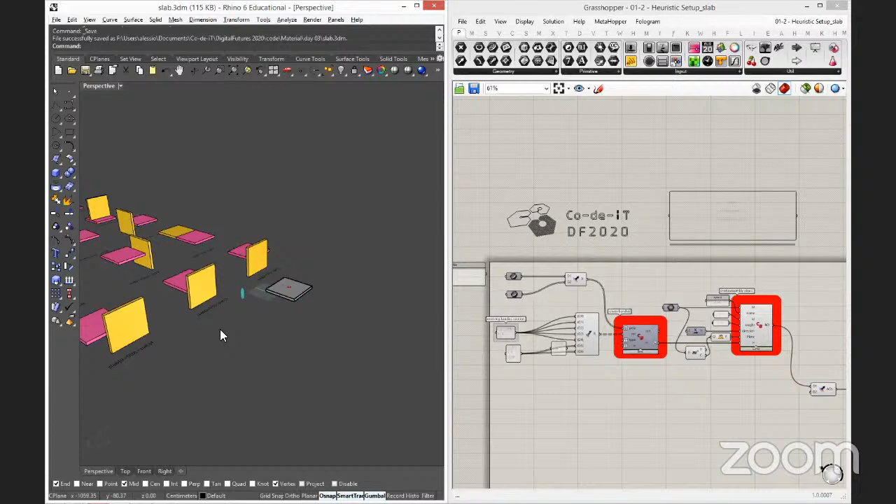Behind this - so yesterday I was fiddling around and while working with some simple combination of components, the one that we were starting to see yesterday made of this block of 2 slabs, something occurred to my mind. I said, okay, these are like 2 identical slabs, so why not reduce it to 1 component and just change the location of the handles?

So that, for example, this one or this combination that was a single component is actually one of the possible occurrences of how these things are assembled together. So while doing this, I tried it in a simple random assemblage.

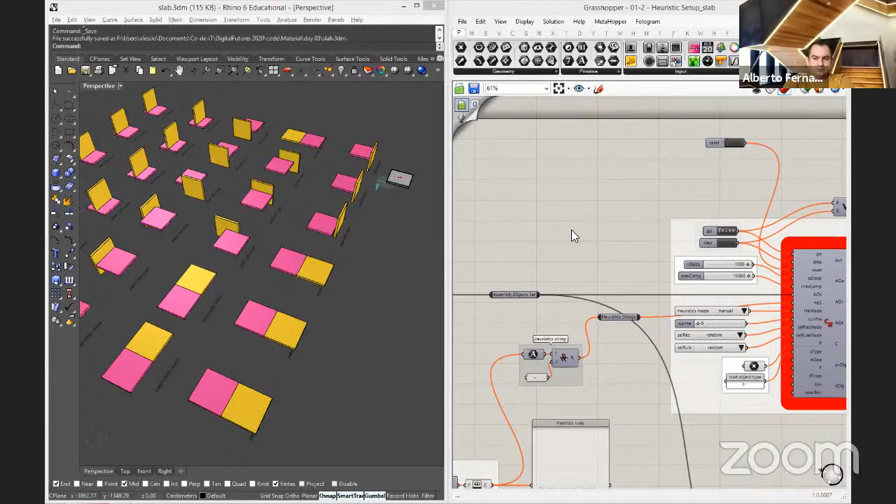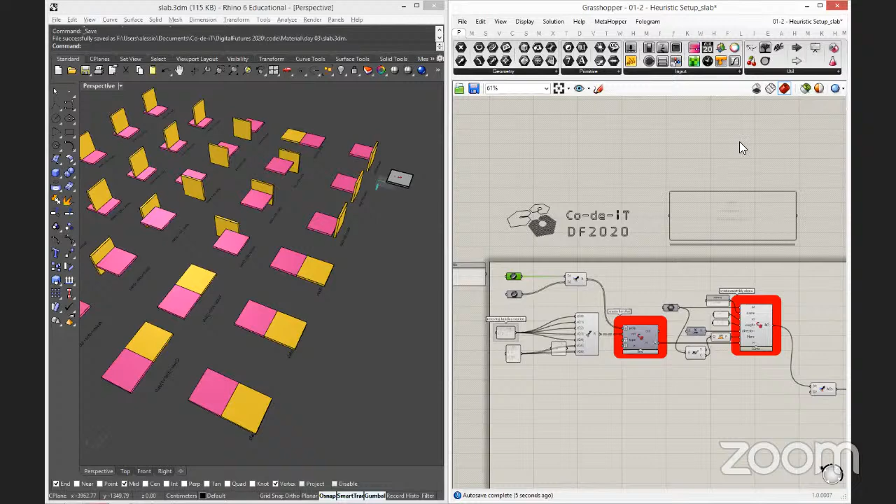It could be that I get an error right now. Yeah, hold on, I think it's complaining a little bit. Yeah, it's complaining because of the thing that I told you, but no problem, because I'm going to just copy paste this thing and it should be okay. Is it? Oops. No, it's not okay. So let's try.

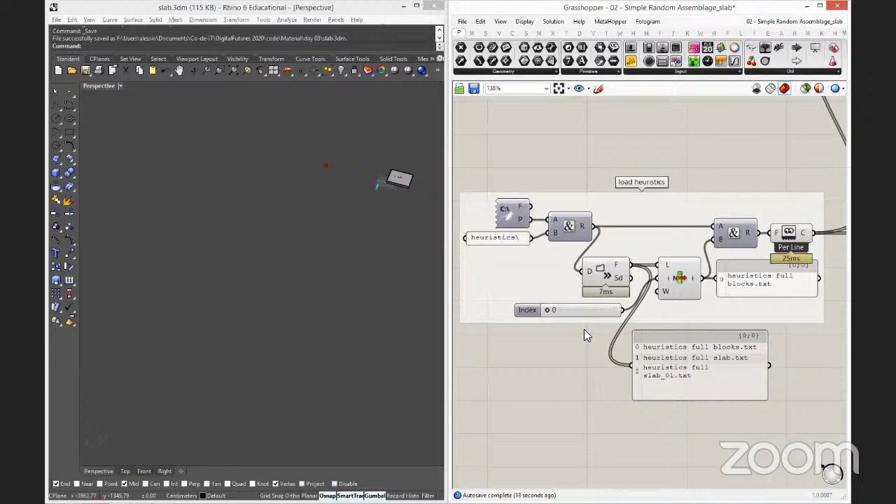Well, then I'm loading - oh no, I'm loading the wrong heuristics, sorry. Let's load this one. Okay, it should be fine. Well, not 1,000 at a time, but yeah, 10.

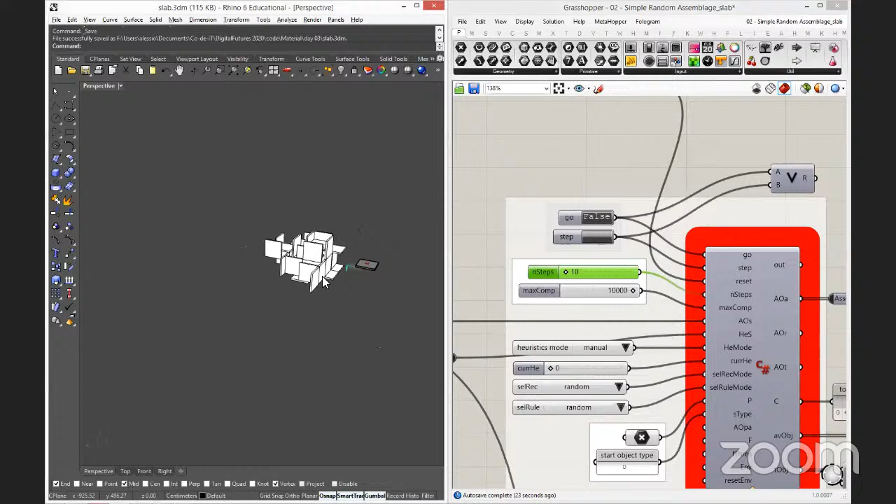So if you go on, it's totally random, so don't expect a lot of order to emerge, but you can already see that there's a very flexible range of possibilities for the assemblies just by reducing a lot the complexity of it, but cleverly enhancing the number and position of the handles.

So there is one that is exactly centered, one that is like a quarter, so it's half of the half here, and one that allows the two objects to form exactly a corner. And then with the rotation, you also have the possibilities of some overlappings, and some other emergent things can happen.

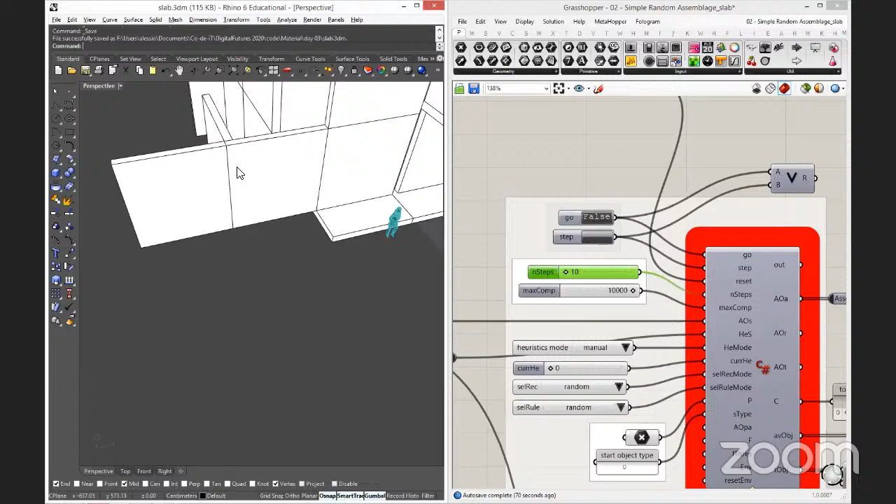It will be interesting to try to get out of this regular grid of overlapping just by moving these handles around a little bit, creating some sort of tatami organization in the interlocking of parts. The system will take care of all the inconsistencies and potential overlapping or compenetration. Sometimes when you realize your part is made of a combination of simpler parts, it could be more interesting to reduce it to the elementary building block—more generic, less specified—and then you open up another range of combinations.

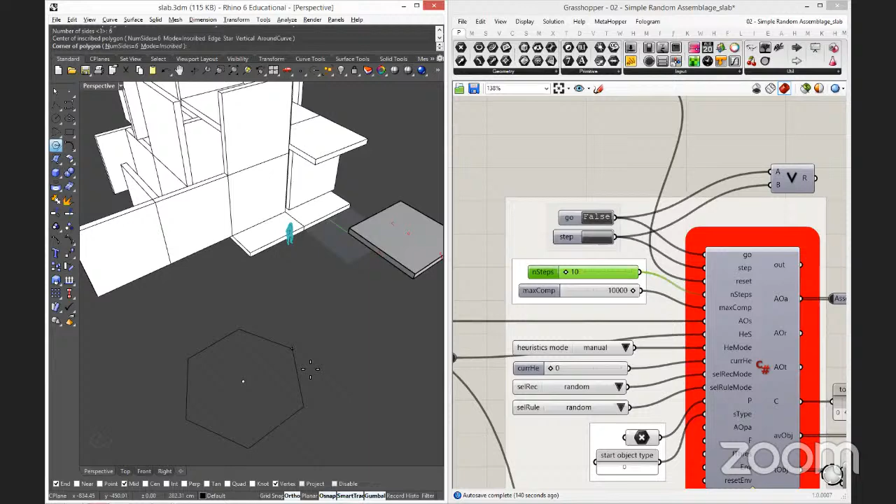One other thing that happened when teaching some students, and also in the master, was that a lot of people were attracted to hexagons. I like hexagons, nothing wrong about them, don't get me wrong. But the hexagon is quite a specific figure already, and it has the property of being extremely symmetric in many directions. So if you tile up a lot of hexagons, it's really hard to come up with something that has a sense of direction, some anisotropy to it. It's a very isotropic figure, like all regular polygons. The pentagon has different properties, but still.

Another thing that would be interesting is to get out of the square thing here and make the slab with different proportions, so that you have anisotropy here too, and see what happens in the assemblage. That will become another interesting thing to see.

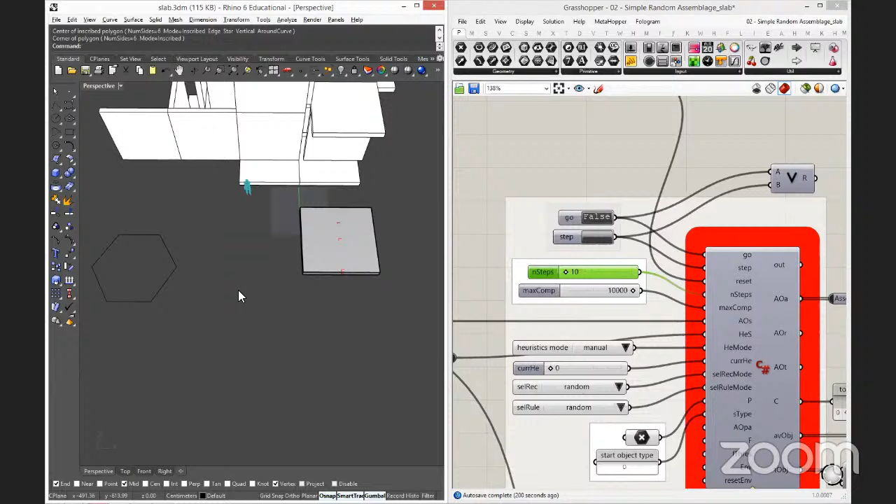But if you look at this, you can realize you can break out this module, this regular thing, in multiple ways that give birth to something more interesting. For instance, you can break it in two, these two trapezoids. And if you think about what a single trapezoid can do—yes, of course, they can combine and form the hexagon again—but then you have a lot more flexibility in what they can do as a figure later.

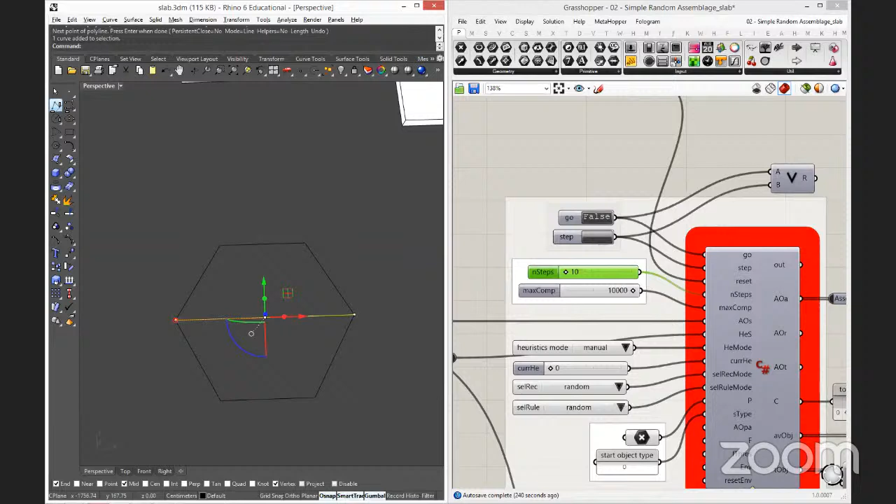Or you can break it in three parts, and then you have like three diamonds. Still, if you take one of these as a single figure, you have a lot more possibilities for an extended form of organization that goes into something less static and less periodic than just repeating the hexagon itself.

Then, of course, you can have the six triangles, but that starts to become a bit too elementary and generic. The figure becomes so unspecific that it becomes like geometric dust—you can make anything out of it, but it gives you no defining characteristic from the get-go.

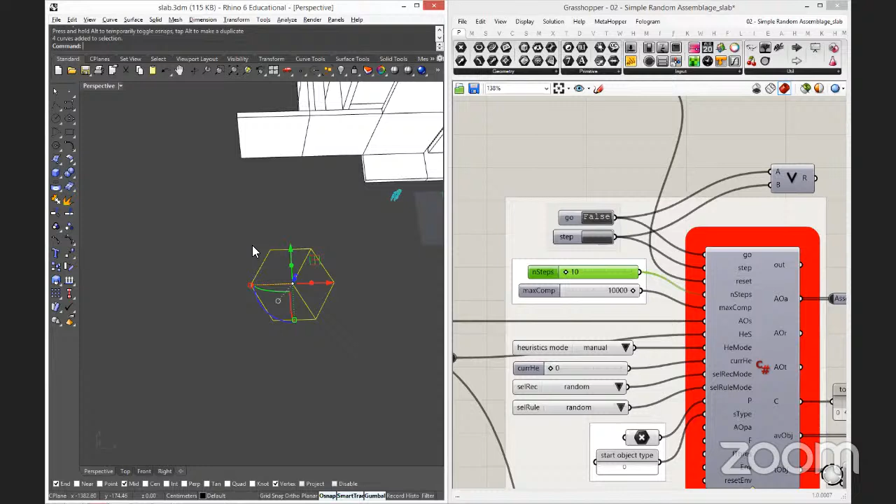So the other thing I wanted to show you was a post-processing strategy. I'm going to save this—I'll update the file related to the slab, and then you could download the material again from the same location. I'll let you know when I've done the update. So I'm going to open the other part, which is the blocks.

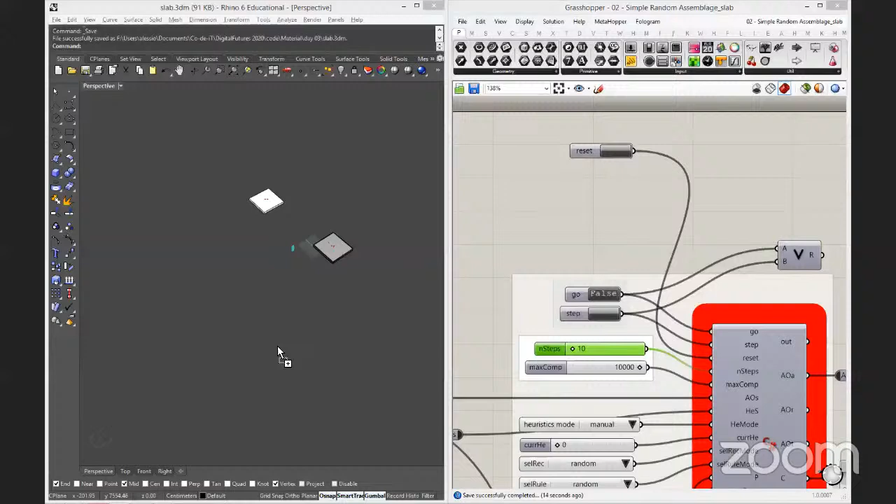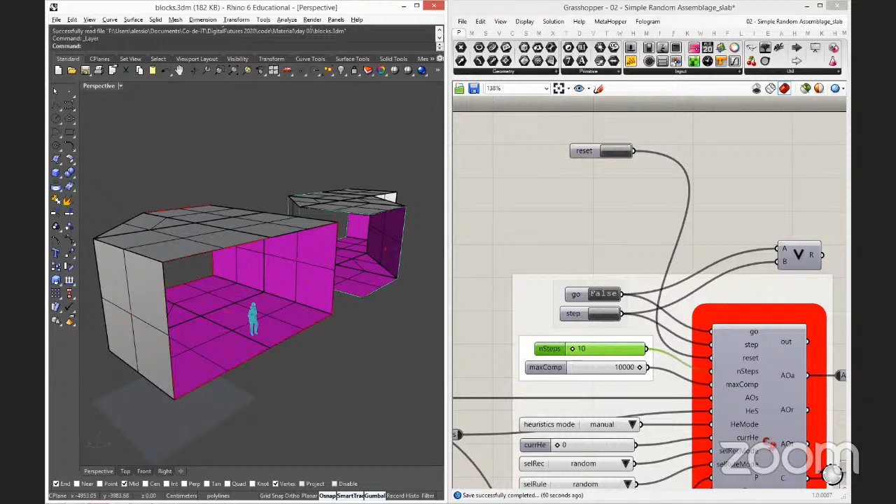In this case, I was working with some of the figures from one of the files I already sent you about the components, but with one important update—so far the shape of the object isn't that important. It was just to get something modular that can attach in multiple ways. I left these openings on purpose that are just in the final geometry. The collision mesh is still a closed mesh—they're in a separate folder because the collision mesh needs to be closed, like I told you, otherwise collision detection doesn't work. But this is the final geometry.

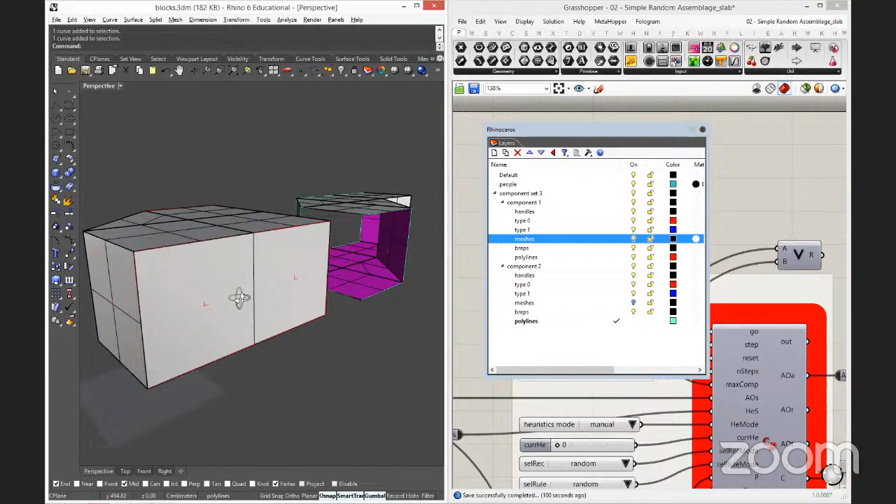In the openings, I've placed these two open polylines—so there's an open or closed polyline here. And in the opening, there are two handles, because if I switch the mesh on again, the opening is basically made of two modules. So each modular part of the object can get into an opening. But then, knowing which handle becomes connected or occupied, you know some polylines might be available and some might not be anymore.

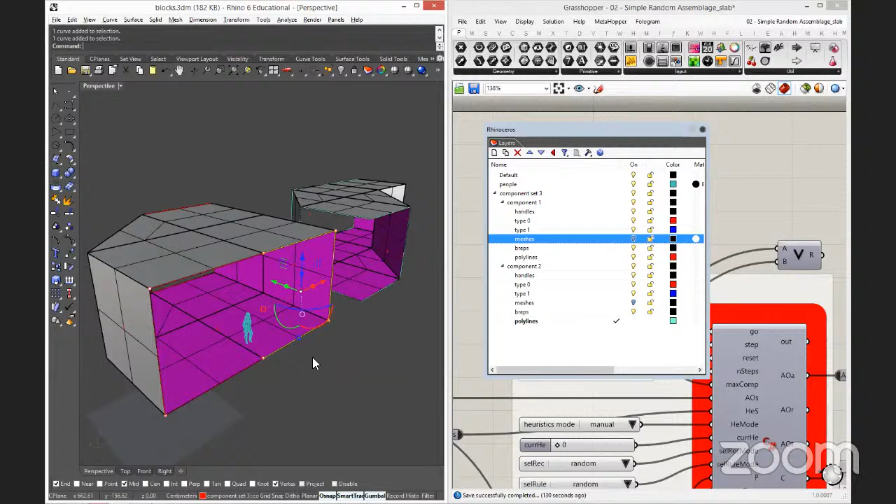So why two open polylines instead of a single one? Because then you can select them by handle, and at the end of the assemblage, you can try joining all the open polylines. The ones that get joined will give you the single figure for this big aperture, this big opening, or this corner opening.

Same principle: if half of it is occupied, this polyline gets filtered by the selection, and you're left with the open polyline. So you try to join everything to see if you get a larger figure, and then whatever polyline is left, you take it and close it if it's not closed already.

This means you can manage openings of different shape and size. And if you work it cleverly enough, you can also figure out when these openings start to get stacked together, so you get an enfilade of openings, or a vertical shaft of windows, or something like that.

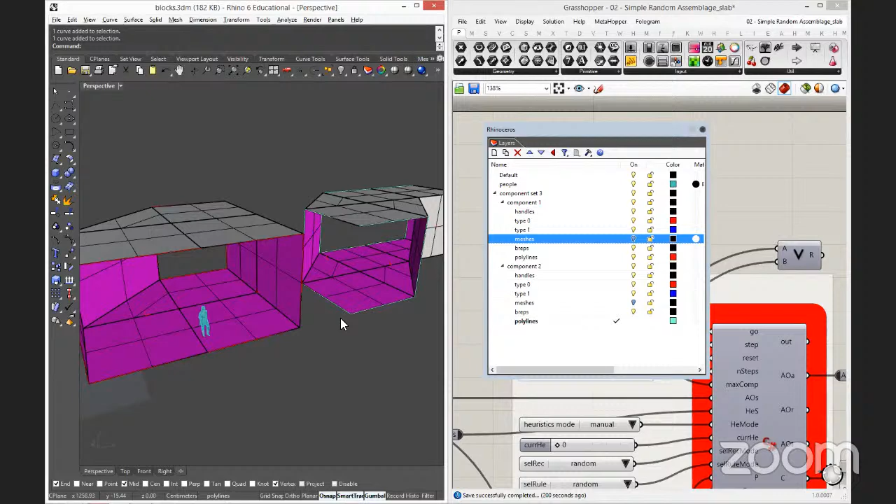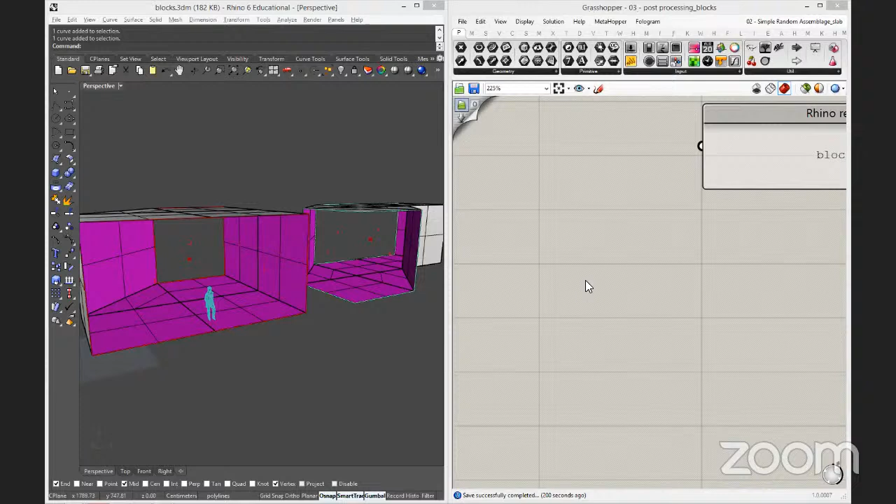So let me show you how it's worked out in an assemblage. There is also a definition that generates the heuristics, and another one that generates a simple random assemblage. But since I want to focus just on the post-processing parts, I've saved this definition that can load it.

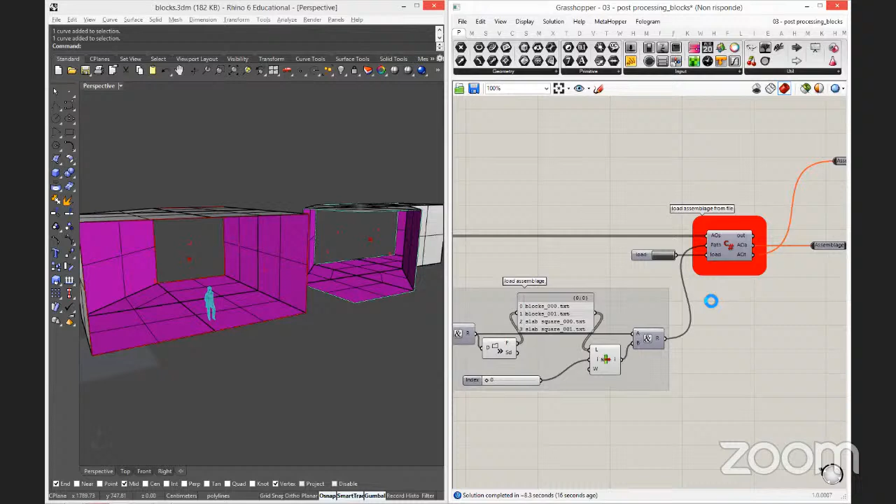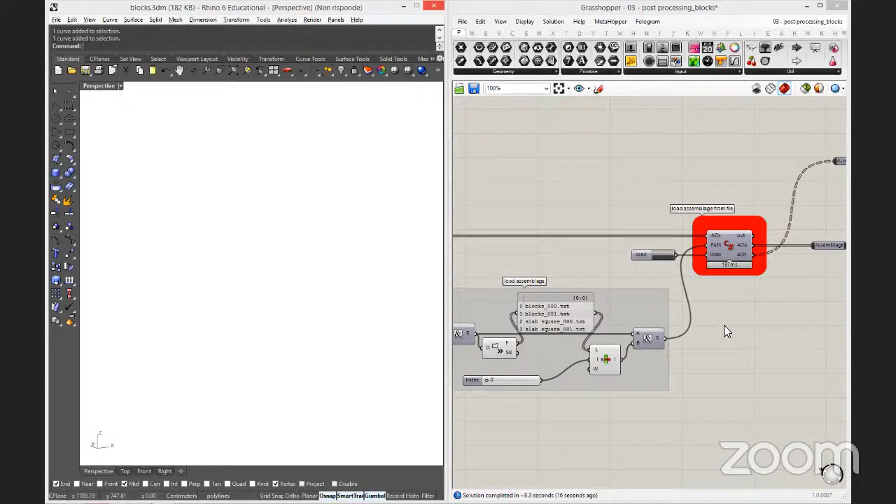Is it loading the right one? Blocks 000, yeah, right. It's going to take a while because the post-processing takes a little bit of time. Okay, it's not done. Taking its own time.

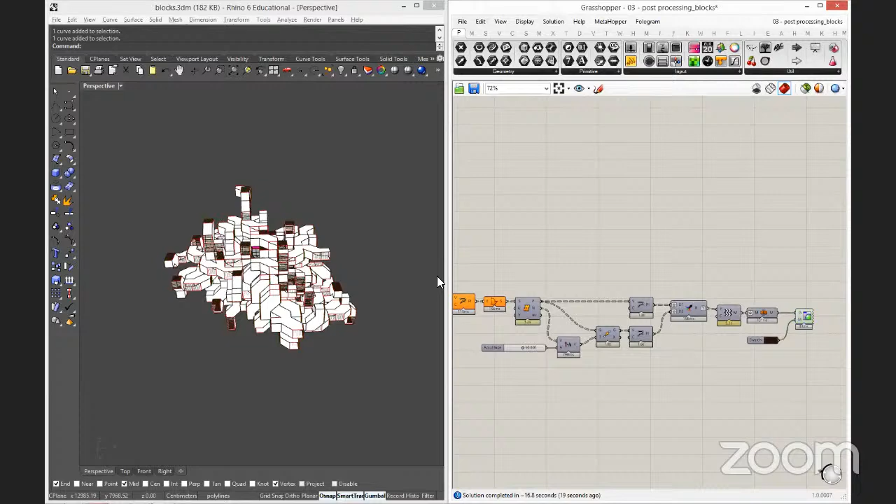But yeah, I think it's all right. So let me go to the end so I can focus the view on these parts. It's okay, oh, I'm looking at it upside down.

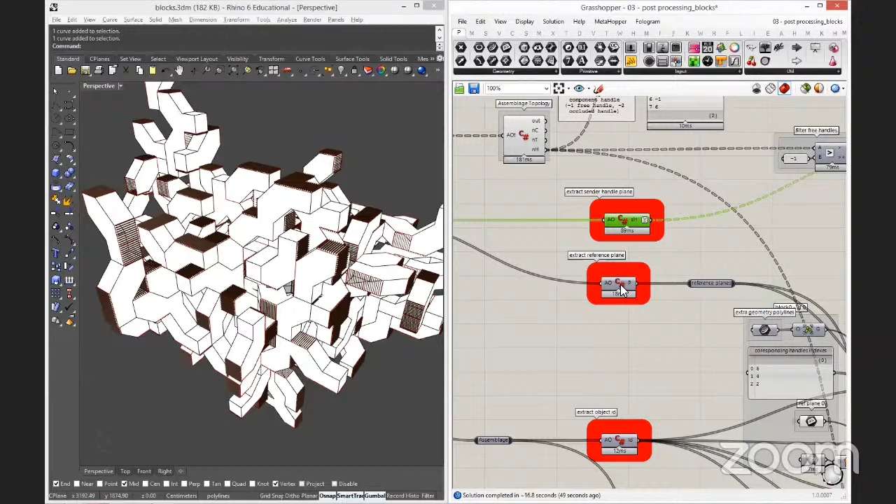All right, so starting from the assemblage that you load from here, that's some of the usual analytical breakup of the assembly object that you've already seen. So extracting the handle plane, extracting the reference plane for each of the components, extracting the object ID to recognize who is who, and also extracting the meshes for the preview.

And then in here, I've placed a couple of groups that contain, for the object at ID 0 and the object at ID 1, the extra geometry polylines I was showing you, the reference plane, and the final geometry, which is the geometry with the opening, that then will be substituted for the collision geometry.

So first of all I need to filter - actually, I am combining all this data according to the object ID, so that here I have, for each of the objects in the assemblage, a list of their IDs. So I'm just associating to each of the objects the proper set of data.

Curves - these are the indexes of the corresponding handles to each of those open polylines. So the first open polyline is overlapped at the place of handle 5. So if handle 5 is occupied, I could filter the corresponding polyline out of the process. If the handle is open, is free, then the polyline is filtered in, and I can use it to place my post-processing data in here.

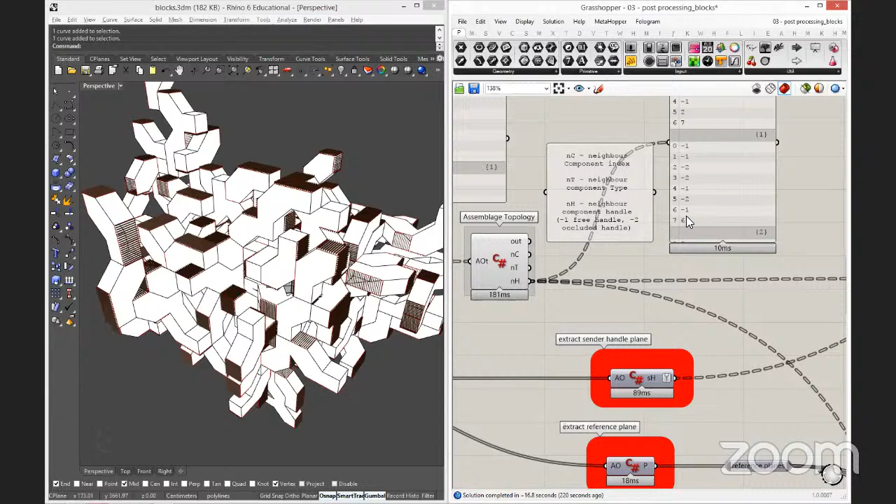So I can filter the free handles, but all I need is the pattern, which for each object is a pattern of true and false ordered by handle index. So all I'm doing is picking from this list, which is general for all objects, just the right indexes for each object ID. So for every object that has ID 0, I'm going to pick the value true or false at index 5, 4, and 2.

So I know that, for instance, the first object is ID 0, and handle 5 is occupied, while handles 4 and 2 are free. So 2 of the 3 polylines in that object are available to do something. Same thing for the other: this one has 4 values, so it's type ID 1, with handles 0, 3, 1, 5, and they are all free. Perfect, I can use all of them.

Once I've done this filtering, I apply it to the polylines. The polylines travel as a group for simplicity, so that I can distribute them according to the object ID. Once they are oriented, they get unpacked as polylines. If you switch on the ungroup after the orient, you'll see that all the polylines have been oriented in place properly, in the position of their corresponding object.

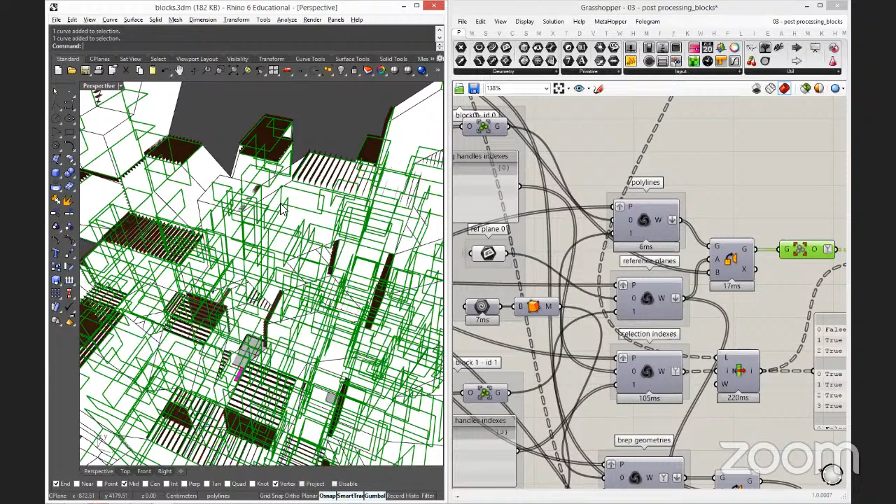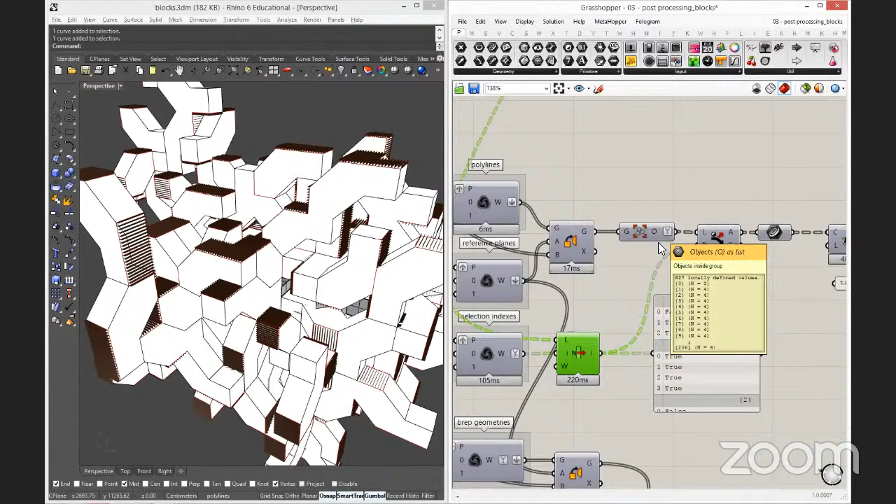Then I need to filter them, but I already have my filtering pattern here. The important thing to check is both the number of data and the structure - they should be absolutely identical, so that for each polyline or corresponding data you want to filter, you have a matching value in the true-false pattern. This tells me I have 827 data in 207 branches, and this matches exactly. So I can use it to filter out the positive data, and then I have only the polylines that are positive. Unfortunately, for whatever reason, I need to check something.

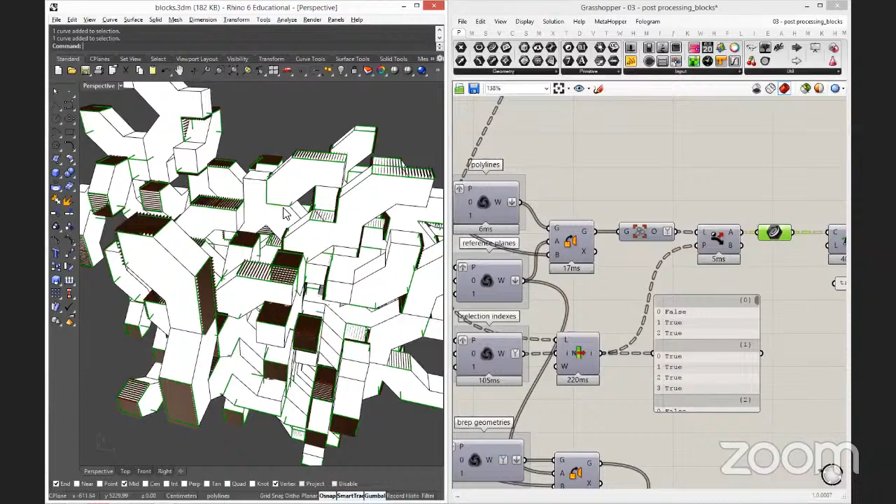This has to do with the occlusion mechanism, which is still not perfect - some polylines fail the occlusion check. It also has to do with the geometry of the object: even if these objects look connected, they might just have fallen into place like this because of modularity, but the actual connection could be elsewhere. It doesn't kill the principle, but you might have to go check if something like that happens. It could also be because the geometry I used didn't have any thickness - it's closed geometry, but I don't know. I still have to find out why some of the occlusion checks failed.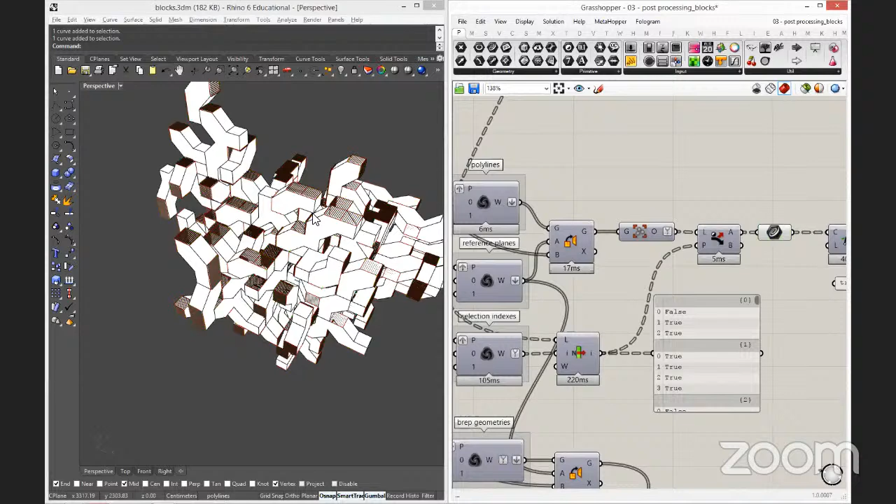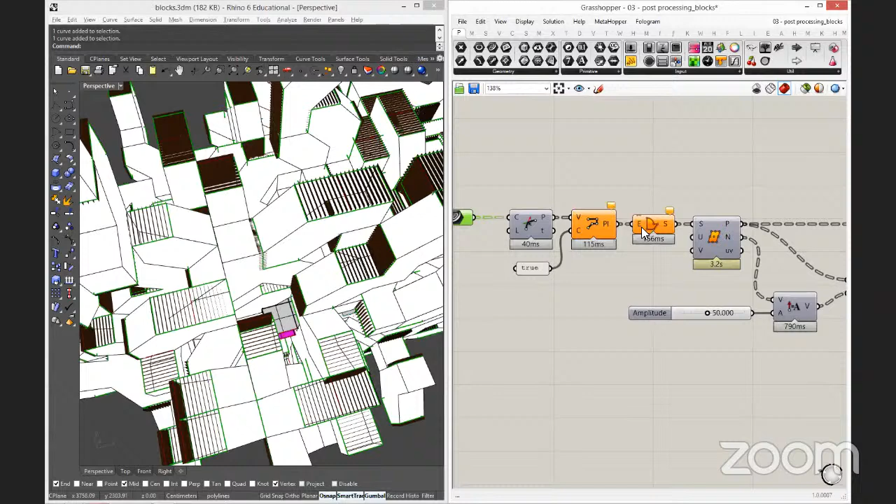What I'm trying to do here is not aim for more complex geometry - I just close everything, even single modules, I don't care. Then I make a surface, sample it, and generate this kind of mesh louvers all over. Of course, once you have those polylines, you can do a lot more - this is just a simple example.

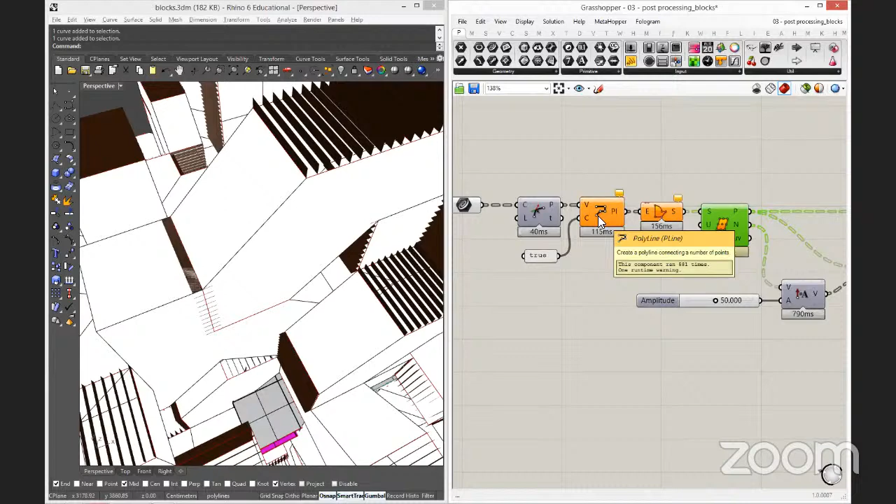You can design a set of geometric objects that work within those polylines, and then selectively orient them. You might sample the condition of the surface once it's in place in the assemblage, and then differentiate whatever appears on that polyline according to position or other conditions and checks you perform. So the polylines are an extremely flexible reference for geometry.

From the polyline, what you can read is first of all the plane and the position. Second, you can read the area of the polyline. You can read the proportions, and all sorts of other data associated with that geometry, and act accordingly.

So if you join the polylines and want to find the large ones compared to the small ones, you can filter them by area, and then you'll have the large ones all in one channel and the small ones in another. If you want to check for this kind of polyline versus the corner kind, you just check for planarity, and then you know you have the planar or non-planar situation, and act accordingly again.

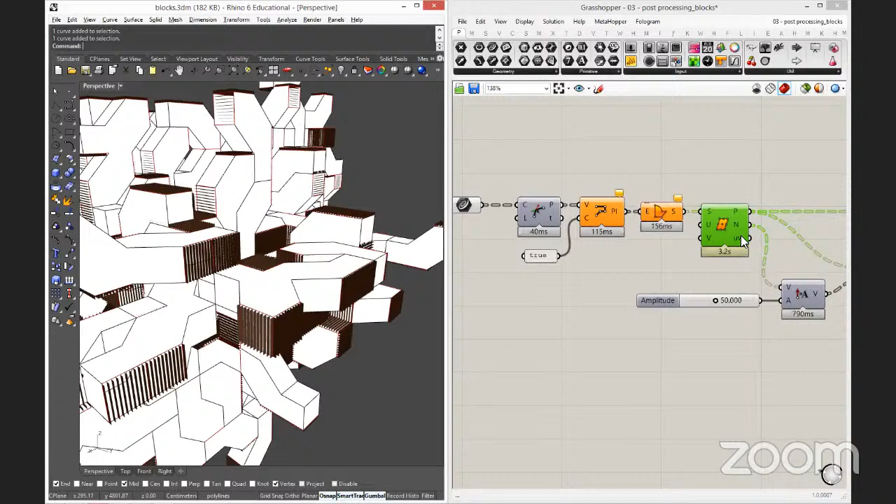There's a lot of things you can come up with in this process - it's just a selective way of dealing with this. Right now all the geometries I used to plug the holes are actually the same, because I wanted to keep it really simple, but you can change it according to the local condition. Like I was saying yesterday, the most elementary thing would be to read an external data field and change the density of those louvers according to that data field.

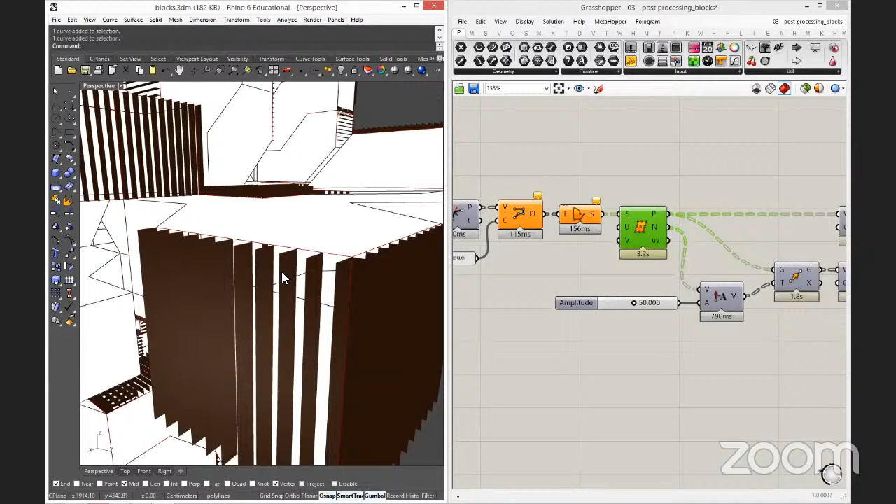That's the most elementary variation you can do. Or you can have these louvers not just be long pieces, but small pieces that have a rotation. And then according to local field data, you have a distributed pattern that's not anymore modular with the object, but depends on a condition distributed in space across the whole assemblage.

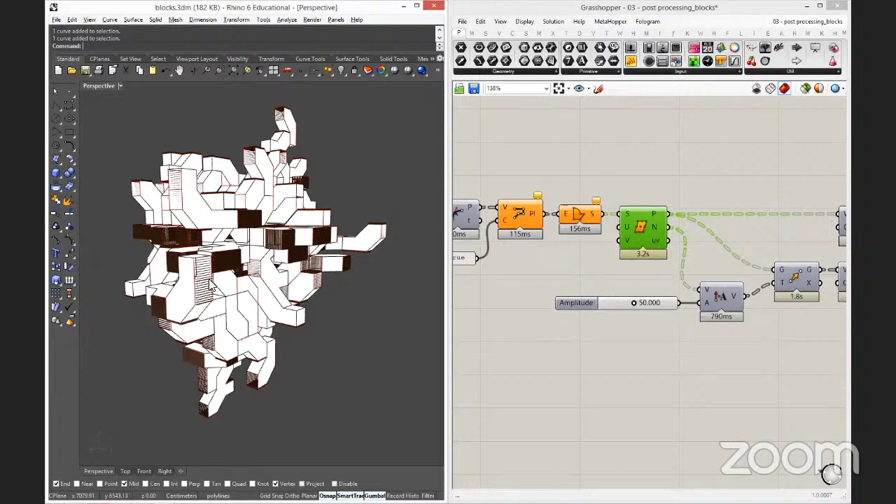Anything that comes to your mind, I just suggest to keep it really simple and close to the abstract condition. Don't go too much into detail because the geometry really propagates and multiplies, and you get a lot of instances very quickly. So it's enough that you do something that proves the principle and becomes a way for the system to produce a pattern when stimulated by some global data. That would be the interesting part.

I'm not really interested in the fact that you can draw a proper window with all the details, technical details, joints, nuts and bolts. That's not the scope of the work we are trying to do in this small amount of time that we have.

It's more about, let's see how the distribution of information can produce patterns in geometry, and this geometry will have a sort of constructive correspondence, but it's not about designing for production tonight or tomorrow.

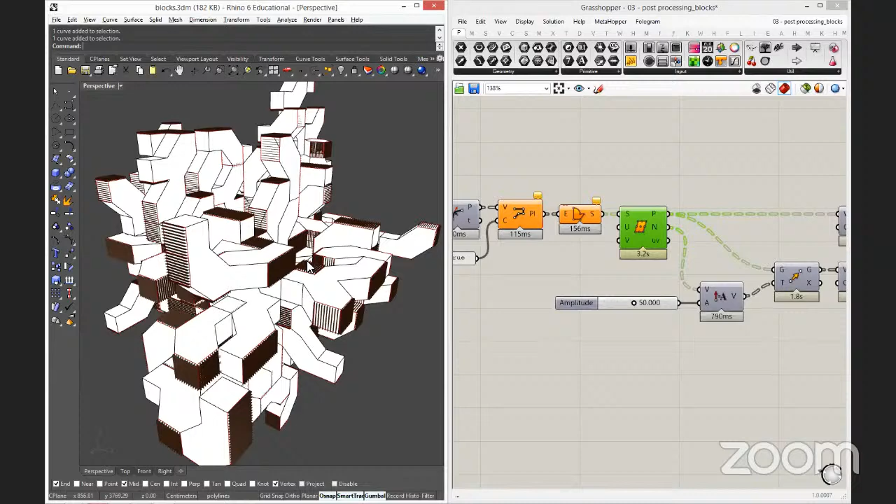Also, the amount of geometry that you will produce is going to be really, really big. So keep the geometries as simple as possible so that you can enhance the quantity and have complexity by means of organization, and once again, not just by means of the single object in itself.

So yeah, that's pretty much what I wanted to show you this morning. Do you have something that you would like to show already, or if you have something, you already want some feedback about it. Otherwise, I want to talk about your prompt or ideas, what you want to work about.

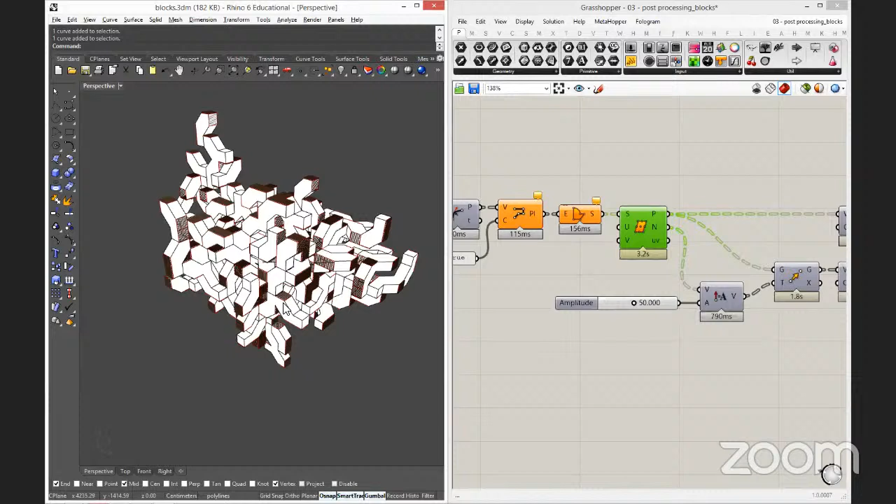Yeah, with Jan, we began to think about what we want to do. Would you like to share the screen so I can? Yeah, why not, wait a second.

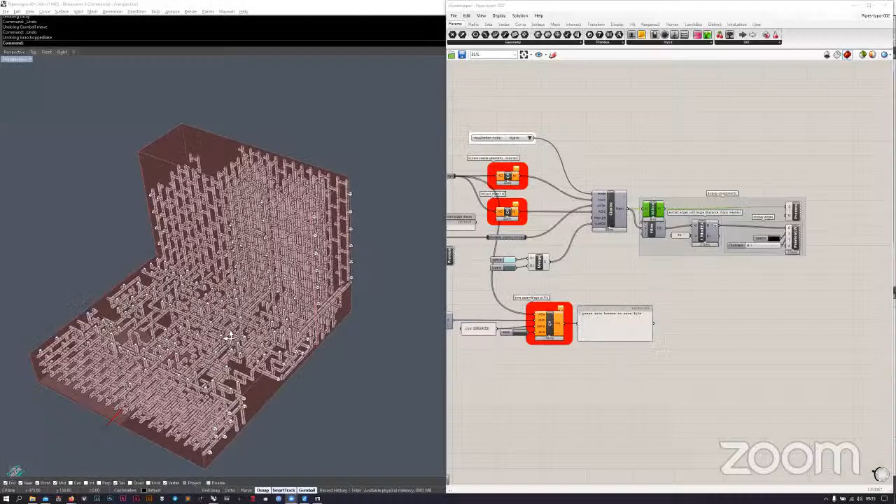So the goal was to work with two references. Jan already sent a mail yesterday about this kind of structures here. For me, my references were more about some pipes, using standard PVC pipes that we could assemble the way we want.

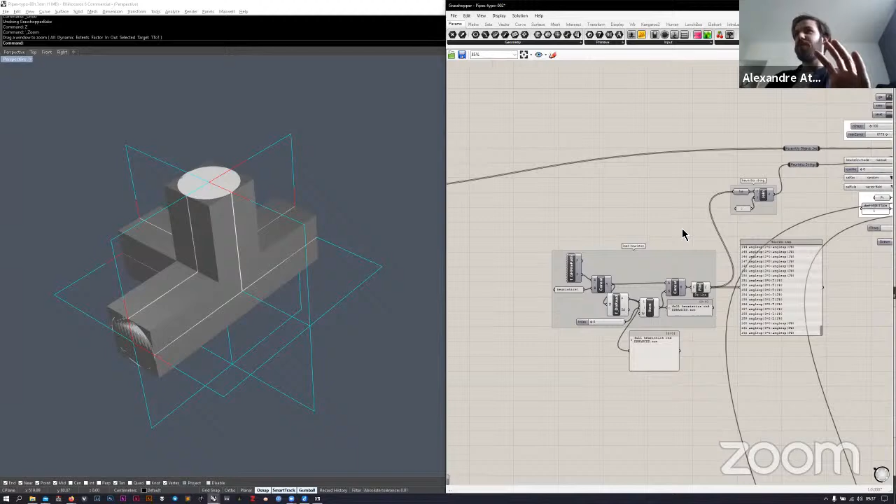So basically, I started by modeling a set of pipe connections like this, based on the same grid, the same length. I have maybe 5 or 6 modules like this. The goal was to have 2 different scales: the micro scale assemblage like this, and then taking these parts to make another assemblage out of them. So the goal was to really use the space as a texture and go a bit deeper into that definition of texture.

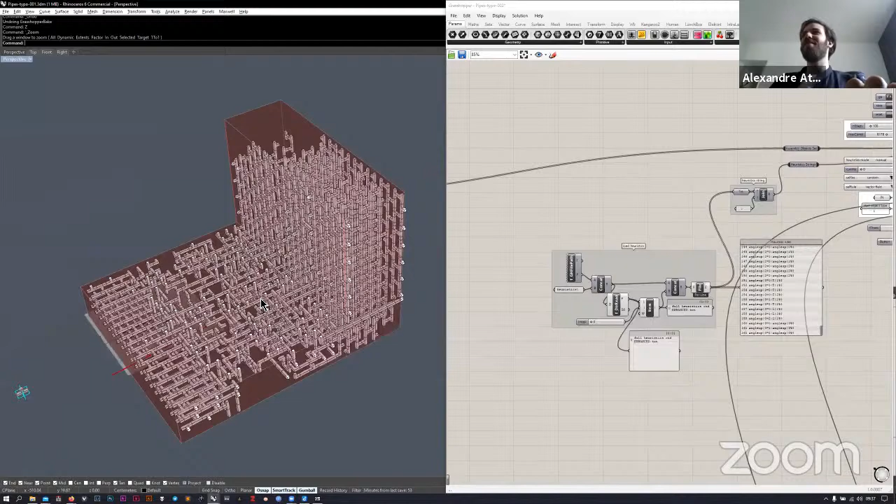This is what I did for the beginning, so it's just the beginning now. What I did yesterday— sorry, something, sorry, my computer.

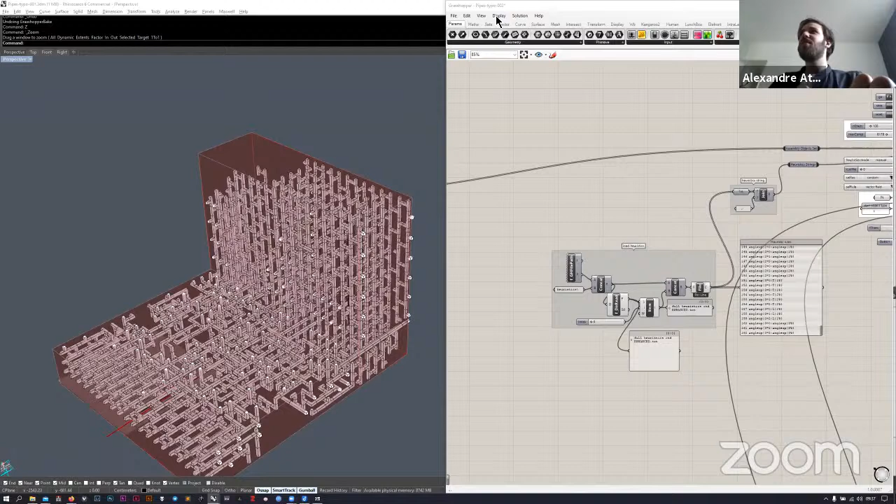Oh, sorry. I don't know, no, it was not— not up to you. I don't know whatever happened to my computer, but now I'm back. Okay, I'm okay, you can go on.

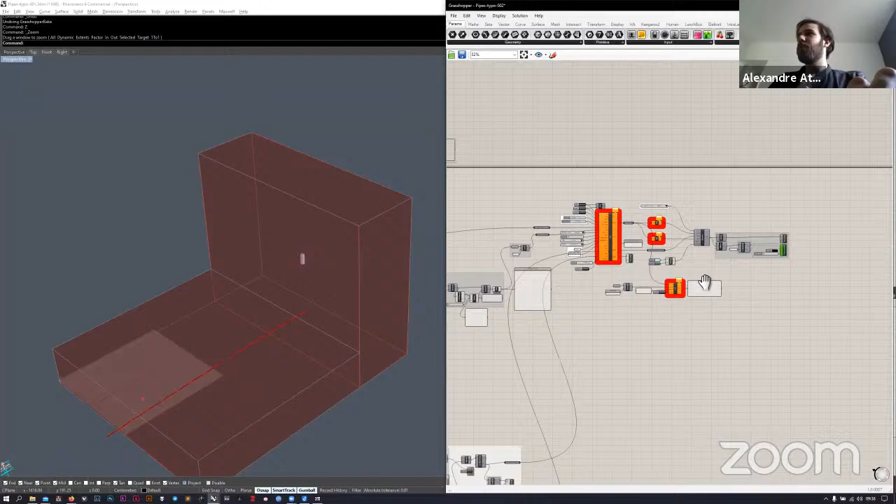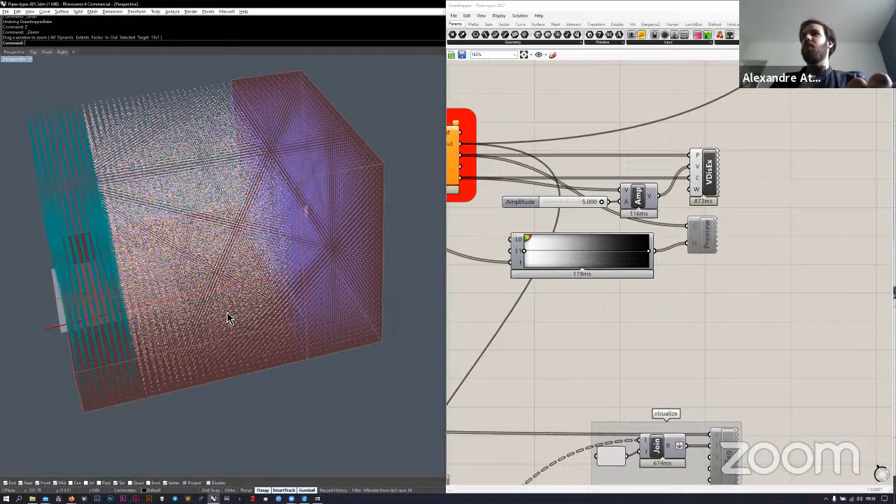Okay, so basically what I did with this was to have— I worked a bit with vector fields in order to manage the direction of the pipe. So at the extremities, the pipe should orient to the interfaces with other blocks, for instance. And then in the middle, I set some random vectors, as you can see, in order to have more diversity and a more complex structure inside. Then at the other extremities, it's still the same. So because of the way the pipes are designed, there is still some regular space between the pipes.

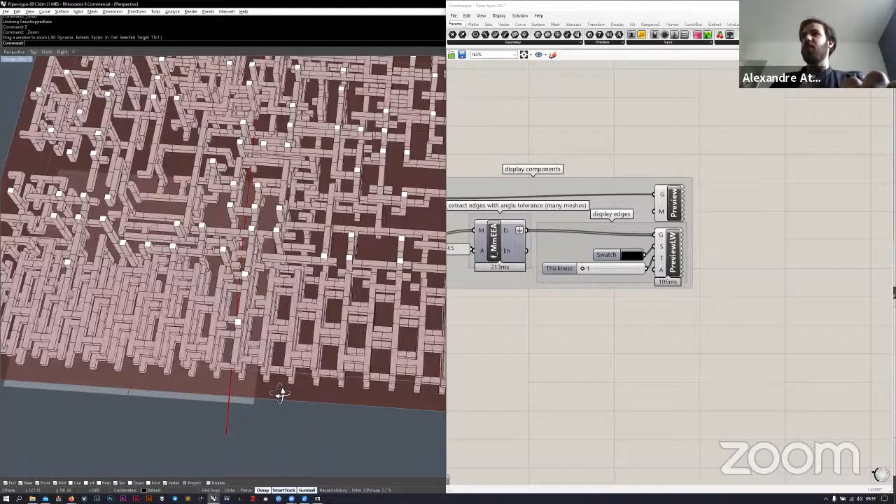So I hope that when we work on some other blocks like this, this could have great interfaces, even if not all the pipes are connecting. Maybe half the pipes are in front of each other when we do the rotations and the other assemblage. We thought it could be great to work with different densities and orientations of the pipes, in order to get global movements and micro movements inside those parts. So yeah, that's it for now.

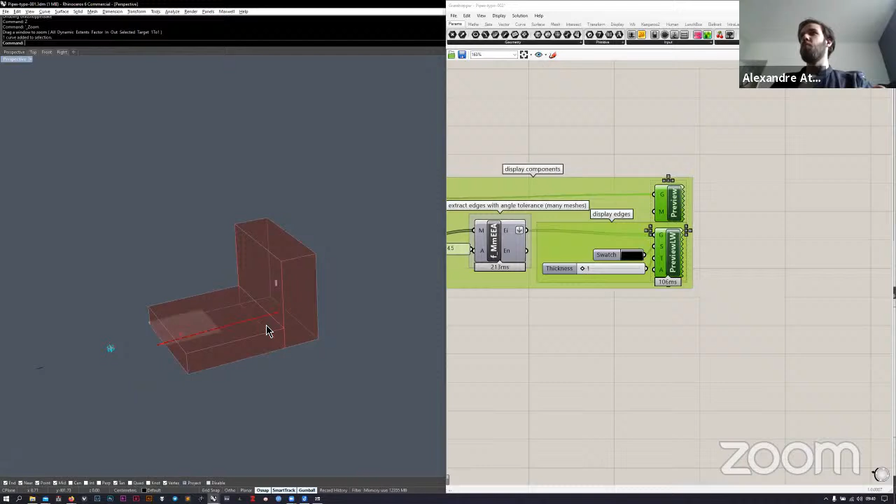So okay, I worked mainly on the micro scale, and then we thought this morning that maybe Jan could begin to work on those kinds of blocks and assemblage of those blocks, and then we can talk to each other to make some go and return and see how we can have some movements of pipes going on, etc.

I can comment on a few things on this. It's a very nice start. I would consider a few things going forward. First of all, maybe the scale difference between the micro object and the intermediate object, there's too much span in these two scales, right?

The bounding object that you want to use as a meta part, built out of it at a scale that's really far away from the constituting object. So the risk is that you will probably come up with a few instances of this, but they will be very recognizable in the final assemblage in the end. So maybe try to work at an intermediate scale that's not so distant from the elementary building block to make the meta parts.

And then try to test quickly how the meta parts assemble together also. Because then you have more chance, otherwise the problem is that you're going to have a very recognizable and quite restricted assembly effect that emerges from the final assemblage, right?

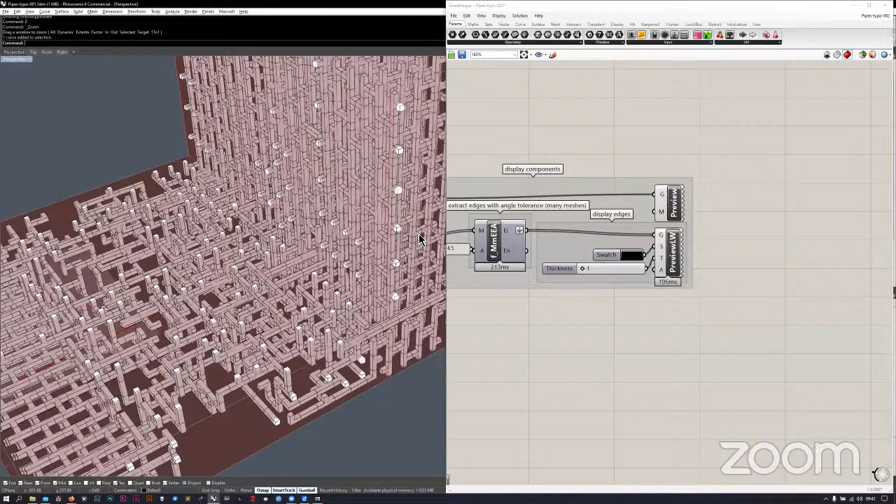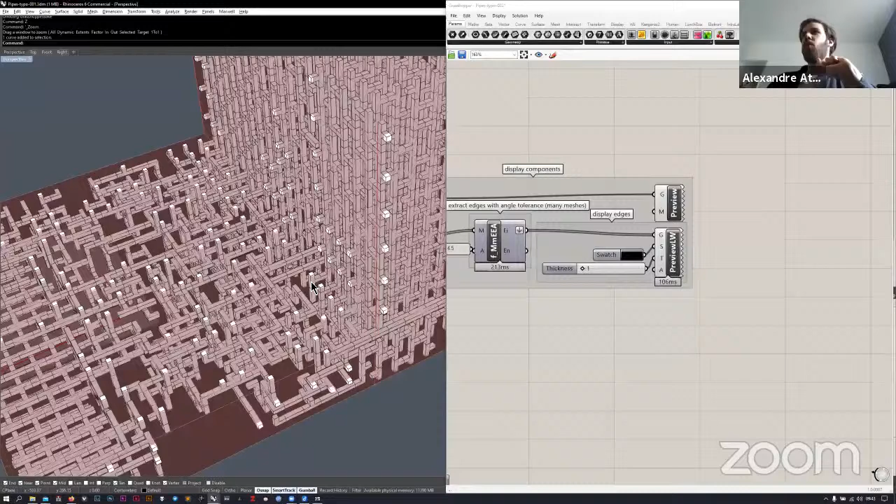The last thing, maybe have also an object, but you already have it, that is not a joint but just a simple length of pipe. Now the thing is, I want more linear pipes, I want to understand how can I give more priority, I don't know if it's with the weight parameter.

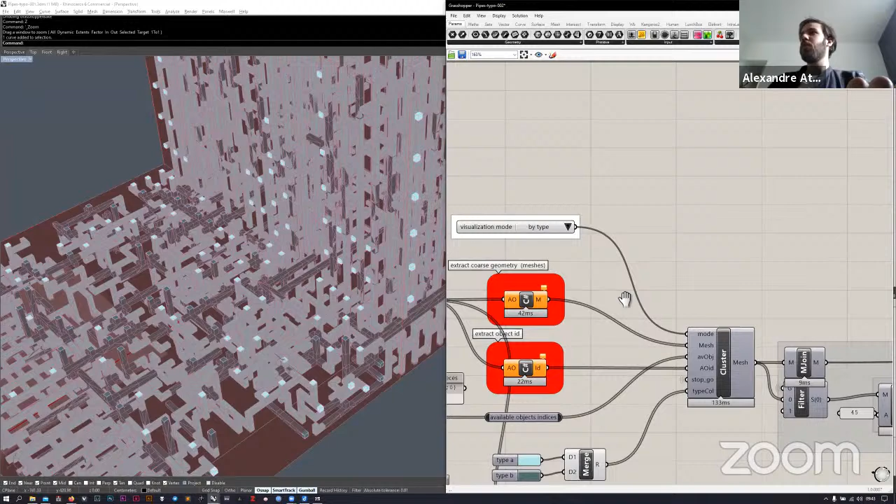If I can do that, but for example there are some connections here that are not used at all. Are you using the random or something? I'm using the vector field for the selRule. The weights are still a work in progress, and I didn't manage to put them to work properly, but that was one of the ideas I had in mind.

The thing is, the selection of the receiver is random, but then it's going to choose the closest to the vector field. Probably one of the things you can try is to duplicate some of the rules in the heuristics. If you duplicate or increase the repetition of one rule in the heuristics, it should get more probability to be caught.

Okay, or I thought maybe instead of working with vector field, I could work with scalar fields with several parameters and prioritize one parameter over another. So maybe if I want to prioritize one direction, is it possible to use the logic of the vector field into the scalar field? For instance, at the extremities I could prioritize one vector, one direction, and in the middle more diversity, or one type of pipe, I don't know exactly.

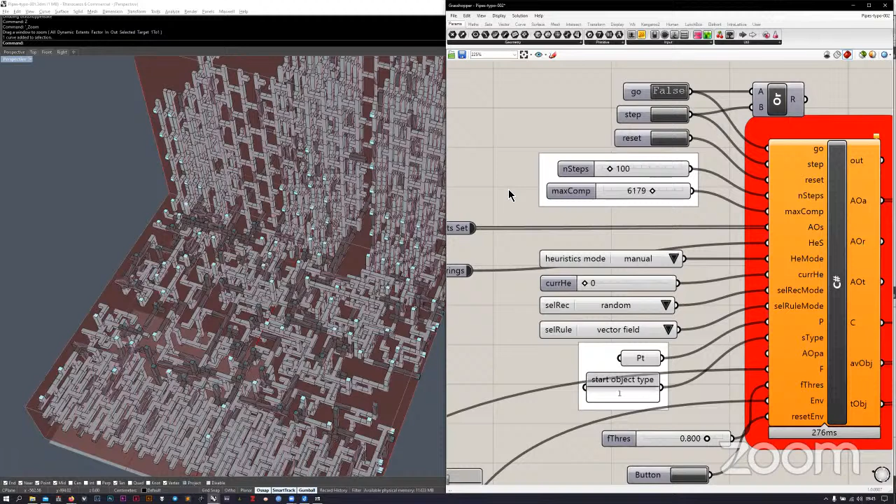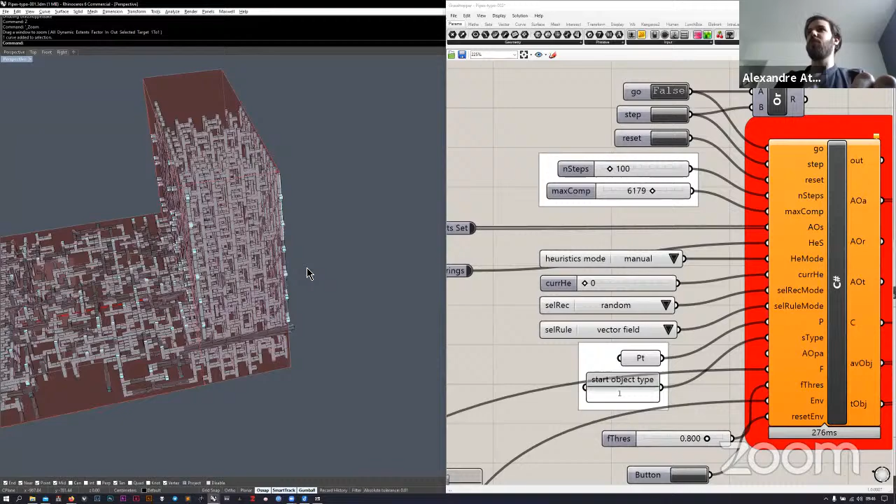Okay, so now I still have to tune this because there's a lot of empty space and it's too regular. It converged to a very regular structure, and I want more dense pipe movements and directionality that can assemble with each other, like Centre Pompidou. I would try to also differentiate a little between the size of the node and the size of the pipe trait.

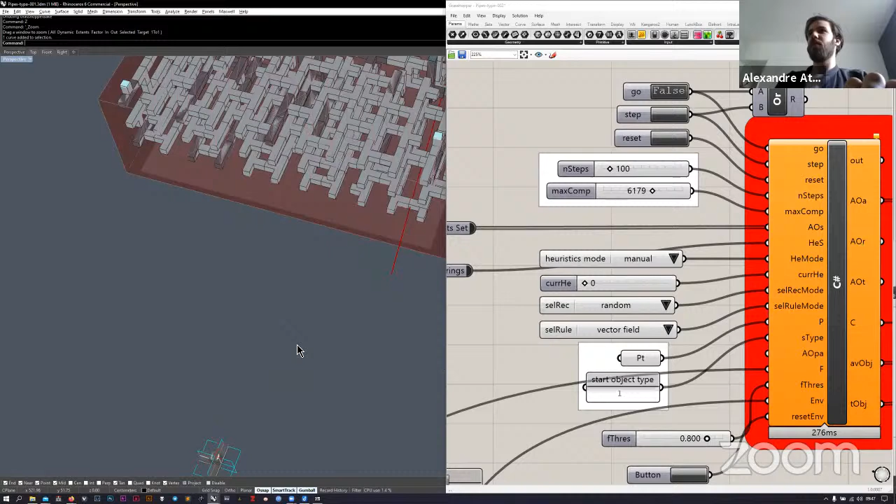Maybe have multiple lengths for the pipe traits, and make the node really minimal, like a little more than a cube with connections on the sides. So maybe just extend the straight pipe to double, or 3, 4, 5 times, with only the connection piece staying small. Or maybe just have two lengths, one short and one long — start with just two. That could be enough to introduce more heterogeneity into the system.

Right now the size of the trait and the size of the node are almost identical in terms of bounding box, so I think that's one of the reasons generating this sort of regularity in the grid.

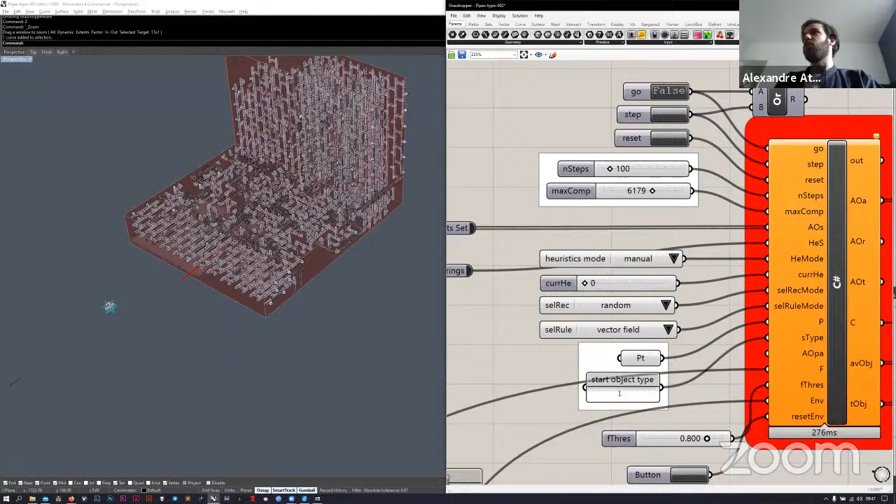So that's it for now, together at two different scales. Cool — would someone else like to show something, or do you have anything you want to show? You didn't have to have anything, it wasn't mandatory for this morning. Go ahead, you're working together anyhow, so it's okay.

Okay, thank you. I would like to ask about one more technical thing. I tried to do some initial setup with the scaffolding idea, which I'm now transitioning more towards this volumetric idea that Alexandre will detail. But for the technical question, can I share my screen and show you?

Just let me give you the permission. Can you see the screen? Yeah, I can see it.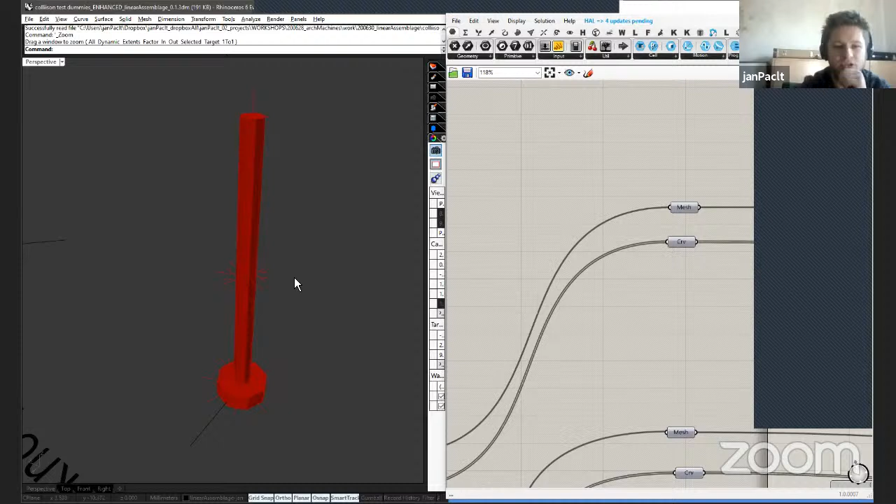So I designed these elements of the scaffolding, which I thought I would use, and I managed to make the heuristic stable. It's very simple — it's what you mentioned, that the hexagon is very symmetrical, so I wasn't that happy with it.

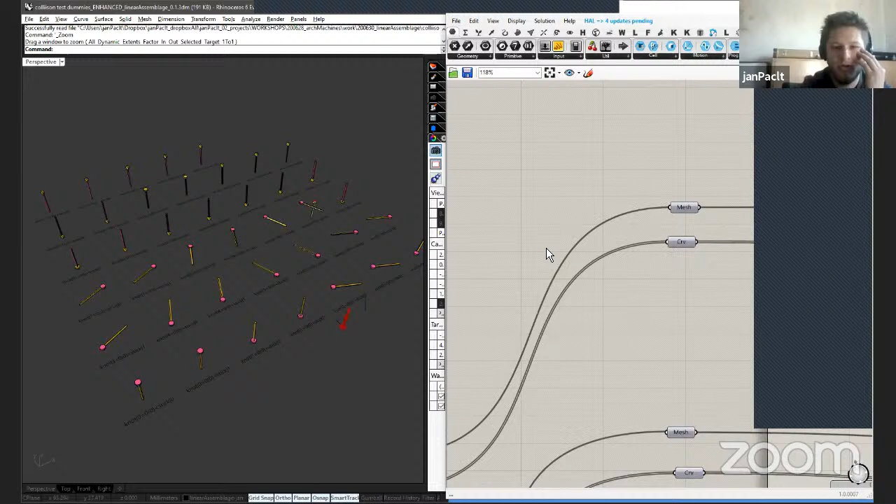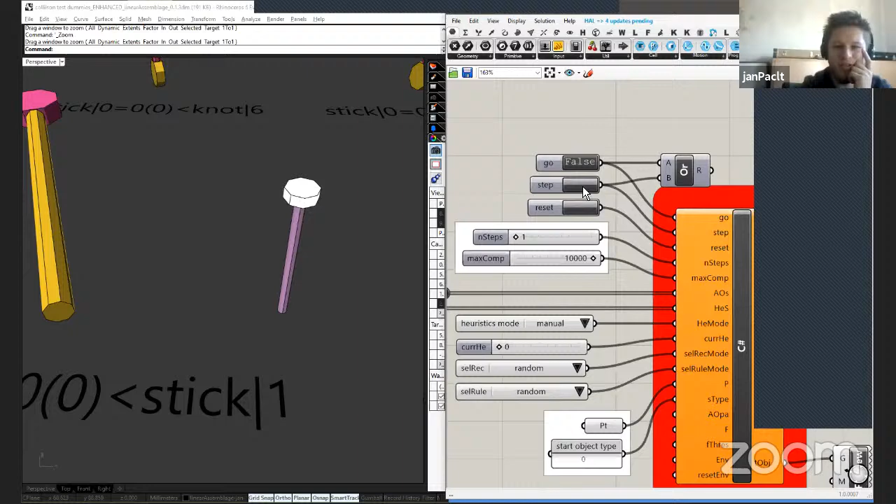But my question is more about generating the assemblage, because you can see here what the assemblage generates, and if I reset it, it just goes through these two steps — because of the heuristics. I don't know why, but for whatever reason the heuristics make it so that once the node has been occupied there, it gets totally occupied afterwards.

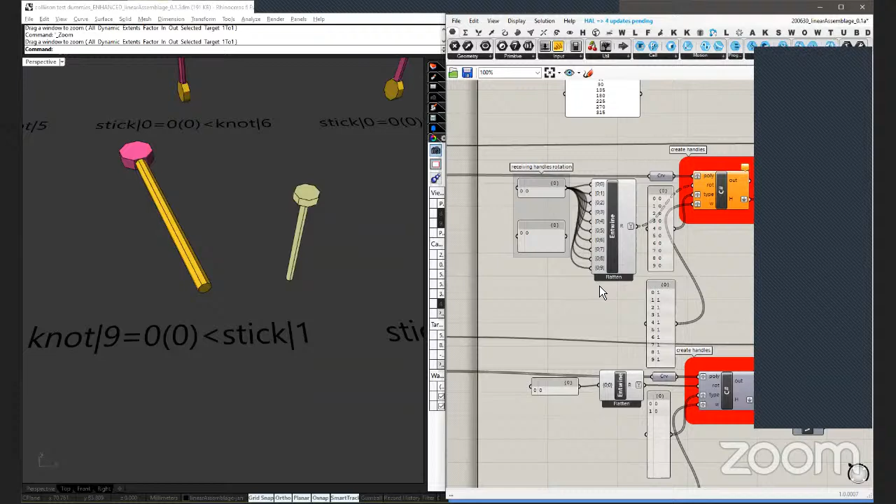So it should be something with how the connection is set, something with the heuristic — but just to be safe, I might ask you to send me the Rhino and Grasshopper file so I can check if the problem is elsewhere, to rule out any technical issues with the definitions. It might also be the orientation of the handlers, since I tried to make it all in Grasshopper.

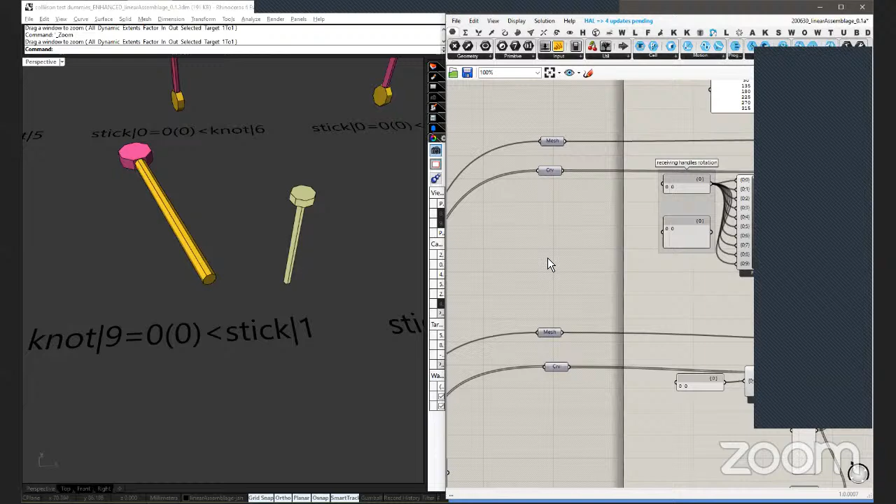It's weird — I think you have enough rules, but it's strange that the system just stops and doesn't add any more. I need to take a look at this directly, otherwise I'm maybe wasting too much time trying to figure it out from here. Great, I'll send you the file. Thanks, okay cool.

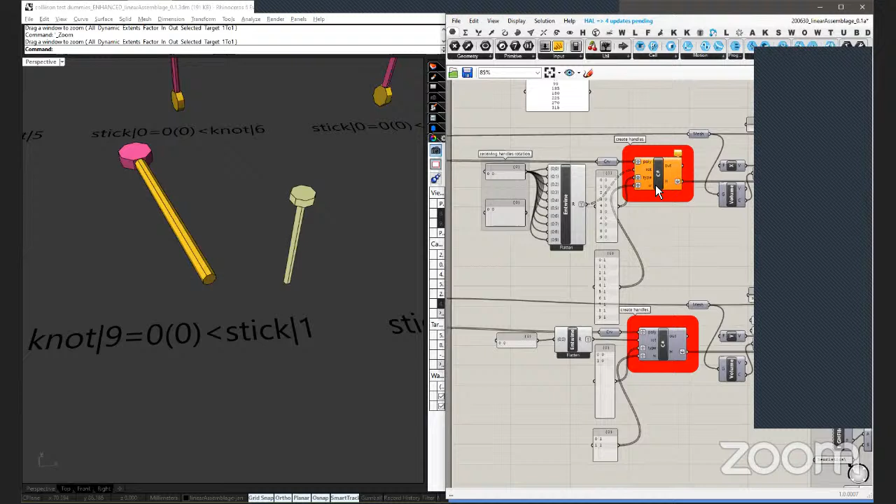So, if there isn't anything else, anybody want to go? I could go next if he's done. Yeah sure, let me just give you the permission. There you go, should be able to share now.

So Andrea and myself, we are thinking about... he actually happened to be working on a project in New York. So why not pick up something which is like a waste product of the shipping industry and then make some...

Guys, can I tell you one thing about shipping containers and how much I hate things made with shipping containers, for a gazillion reasons, and how they are such an incredible fad of architecture in general. If you want to work with block geometry, that's totally fine, but please don't bring shipping containers into the mix. This is like a personal plea. I will have to spend the next two hours explaining why this is such a bad idea, but I don't want to get into that, just please don't use shipping containers. Use blocks. Block geometry is totally fine, the same proportion as the containers if you want, but please don't mention the containers.

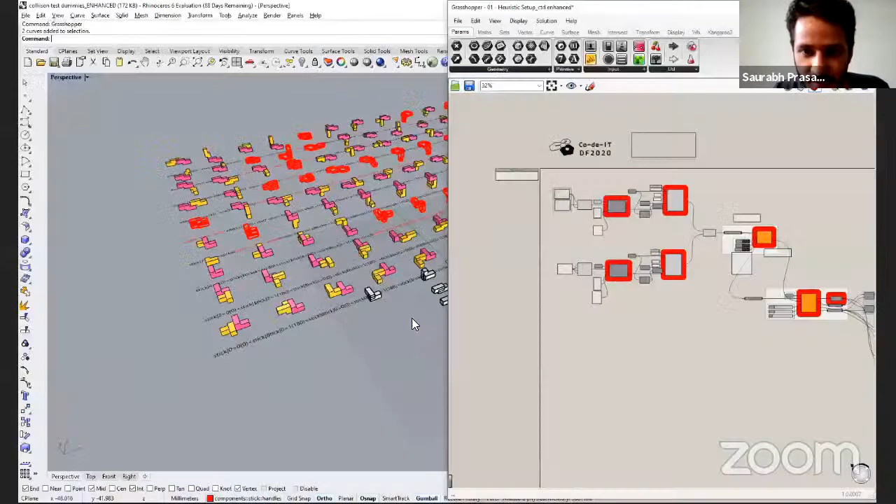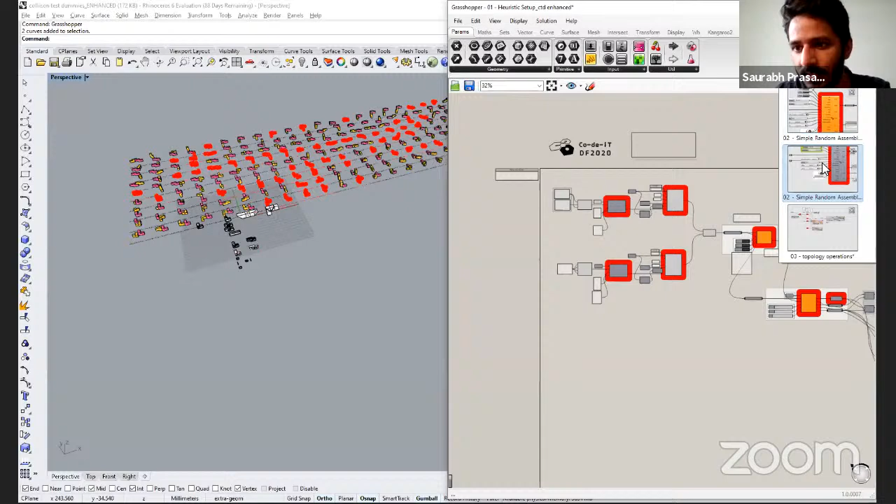Do you see the Rhino? Okay, I'm seeing Rhino and Grasshopper now. Yes, okay, cool. So these were some basic iterations we did this morning, just some random heuristics we came up with. It was completely just a very raw idea, and we ran the standard definitions you shared with us yesterday, and here's the kind of geometry it develops. Before we move further ahead, we wanted to get your first-hand opinion about it.

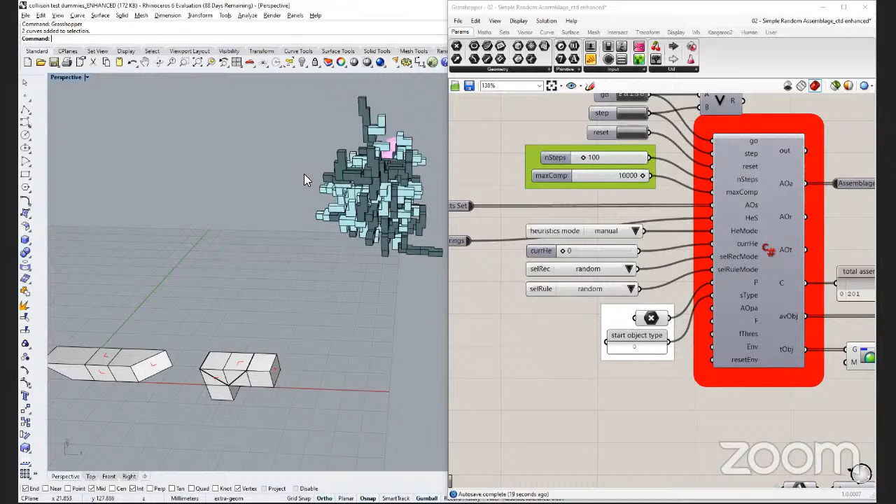I mean, the idea of working with a basic block geometry is totally fine. I think you should capitalize exactly on what I was showing this morning, using maybe a single component and try to be clever with the connections. And then out of that combination, you start to design geometries to put into this placeholder block, a geometry that might also have openings, some space inside.

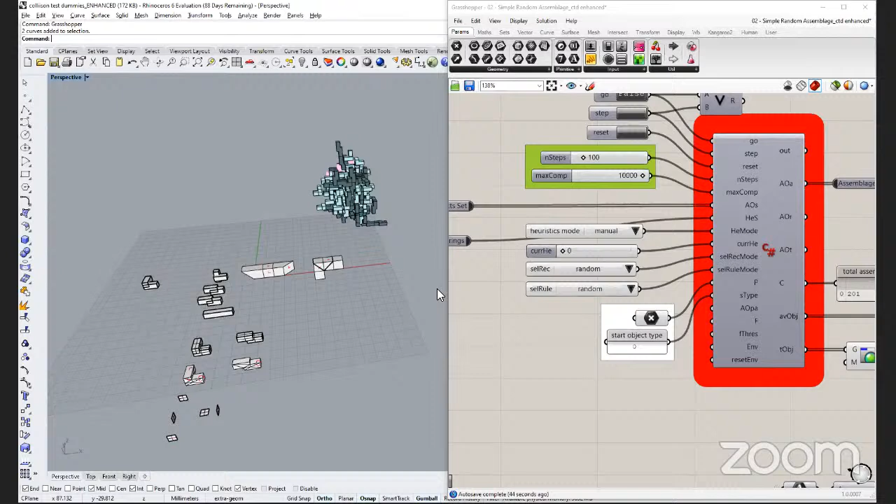So I think the interesting part, after shrinking and making it the most minimal setup possible in terms of geometry, would be to explore different conditions, maybe with vector and scalar fields in the assemblage, so that you move beyond just random aggregation. And from the assemblies you start to do randomly, the interesting idea is to say, okay, let's see what rules are generating something interesting and what rules are actually just making noise. So the other suggestion is to try to be very selective with the rules.

And maybe you can also be selective at different moments. So you divide the assemblage into phases, and in one phase you use a very specific set of rules, then save it, then go on with another specific set of rules. So you can start dividing the work in parallel, to try to see the combination between handle positioning and the heuristics that follow, or the heuristic selection, and see how you get on with those combinations. Because then what you have in your hands, you can treat it perfectly like a brick at some point.

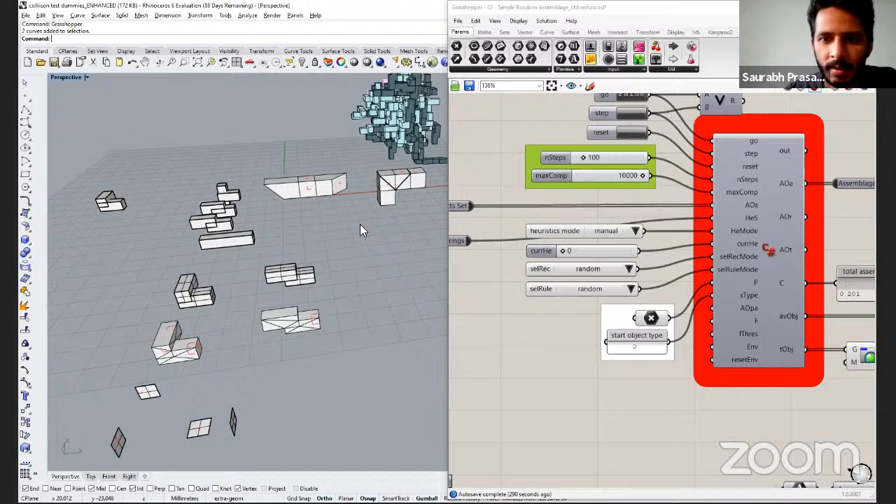All right. I don't have anything more than this. Okay, that's cool.

I think it's incredibly flexible—to me, nothing is really boring at some point or too elementary, because you can always find new ways of working with simplicity and get complexity out of it just by breaking a little symmetry somehow.

There was a study—I don't remember the author's name exactly, maybe Paul William Anderson—studying the complexity of crystals in 1972. It turned out the perfect regularity of the crystal was very different from the crystal at eye level scale, because in the end the crystal has this kind of broken symmetry. They never complete the symmetry full circle. So there's this missing element that enables construction of a more complex structure at a larger scale.

So if you break a little bit the symmetry of the handle positioning, the construction enables this kind of thing, and you can experiment with different heuristics or different handle positioning to see what kind of complexity you can extract from the simplest object anyone can think of in terms of construction. I think it's an interesting challenge.

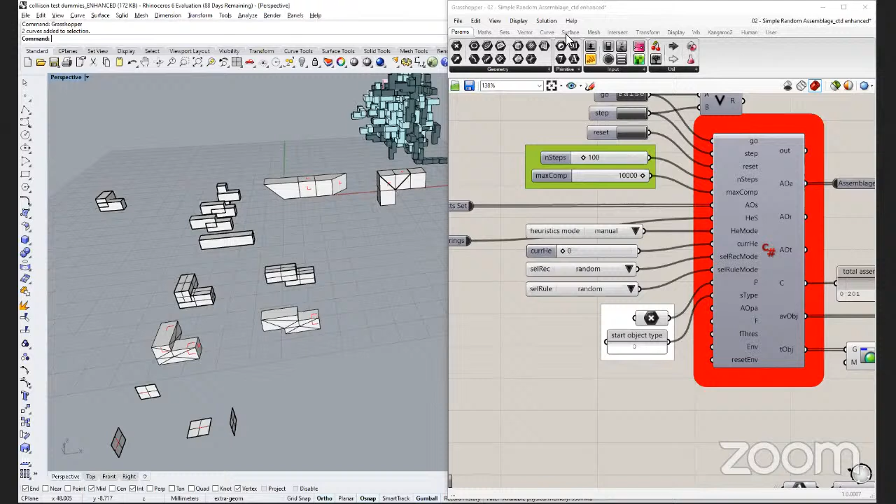We'll work on these pointers that you gave. All right, very good. Thank you. Thank you. You're welcome. I'll stop sharing now. All right, yeah, thanks.

So it's already 10, so I don't know if anybody else would like to show something. I'm still available. Otherwise, maybe you can just work a little bit. When did I say we're gonna have this?

Yeah, I would think it's more important to leave you time to work at this point, and then have a review meeting this afternoon at 2 p.m. What do you say? Is that okay, like we said before? Right, yeah, yes, it's okay. All right, in any case, I will be here with the computer open, if it doesn't melt, Zoom open.

So if you want to reach me, either email or try Zoom chat. In any case, I am available for quick feedback, and if there's something more important at a general level, I will let you know. All right, so have a nice and productive working morning, and if nothing comes up, I will see you at 2 p.m. Okay, see you. Great. See you guys. And for the YouTubers, we will connect back at 2 p.m.